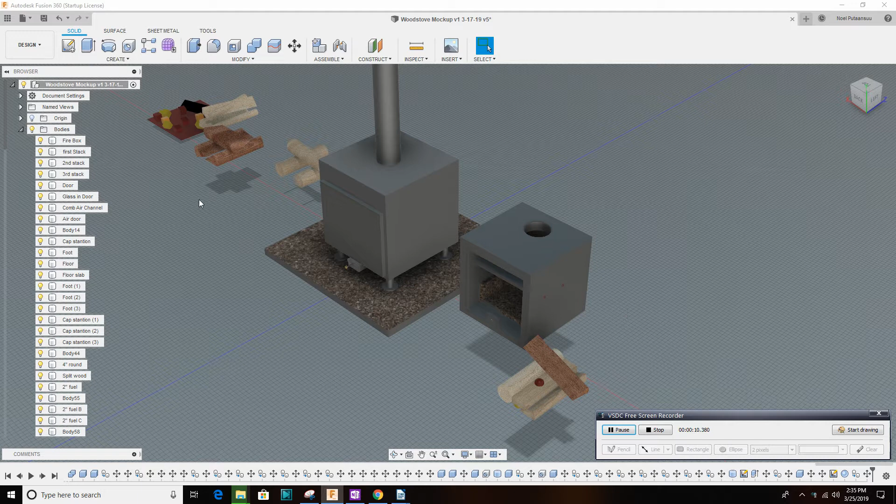Good day, this is chapter 2 on wood stoving. Fuel. I want to talk about fuel. I've got my stage set up here with some fuel, and I'll go through the various fuel.

This pile right here that I'm highlighting with my mouse are 4-inch and larger rounds. The next pile are 4-inch and smaller split wood, or just split wood in general. The difference being that on round wood you have the least amount of surface area compared to your mass.

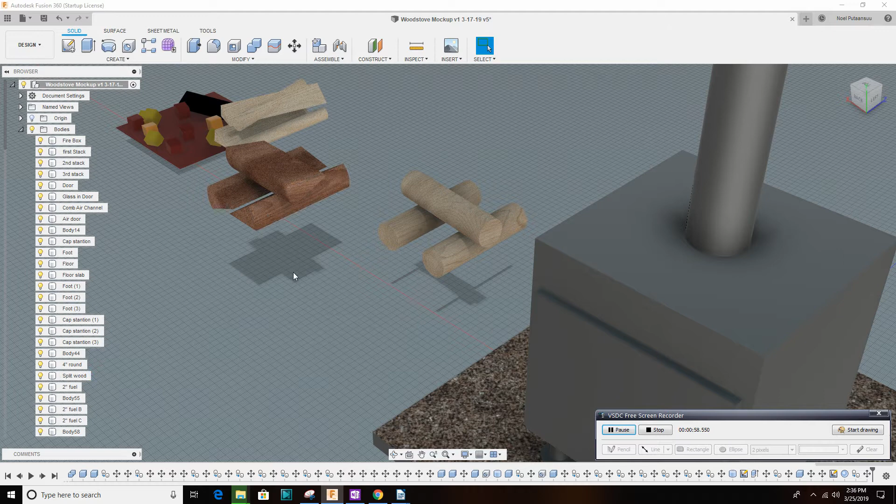Round logs are going to be your longest burning logs. Split wood are going to create more heat in a shorter period of time. You're not going to have as long a burn, but it'll be easier to get your wood stove up to temperature.

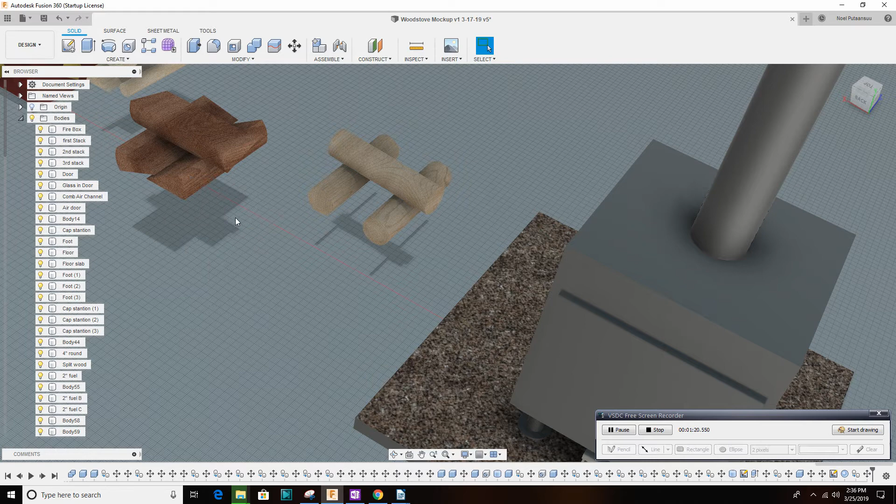My third pile over here, I'll try to rotate around to it. Now that didn't help.

This pile is anything less than 2-inch on its thinnest side. So a 2x4, a 2x6, a piece of plywood, a piece of oriented strand board, particle board would go into this category right here. These are going to be your highest heat producing fuels, shortest burn time.

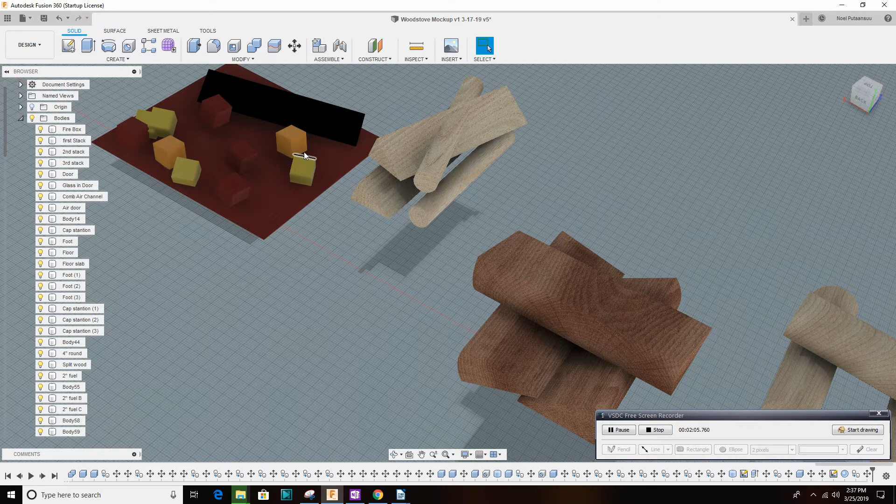On the end here we have a glowing ember. This icon CAD drawing represents a glowing bed of coals. And if you have a glowing bed of coals, you can easily put your 2-inch material or your split material and even one of your round logs on here.

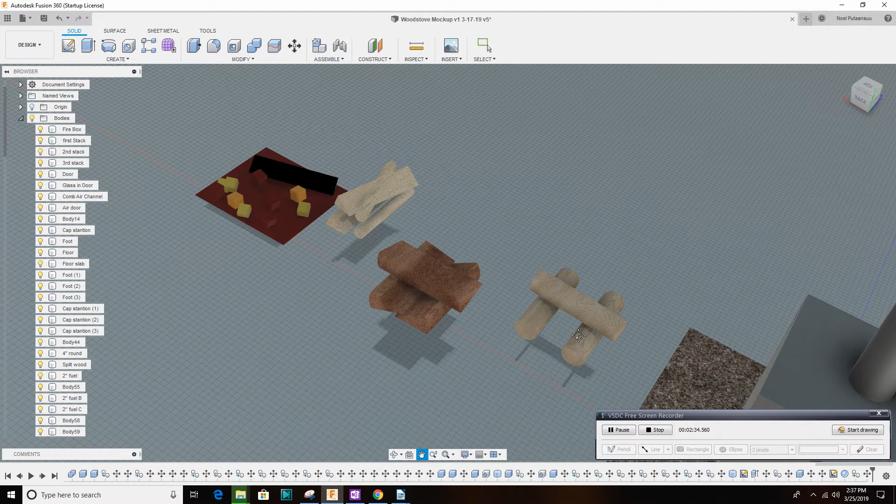Okay. Let's see if I can manipulate my... Alright, we're going to build a small fire here. In this fire we've got a round log over 4-inch, one of them. We have one split piece of wood. We have one 2x4 and another split piece of wood on top.

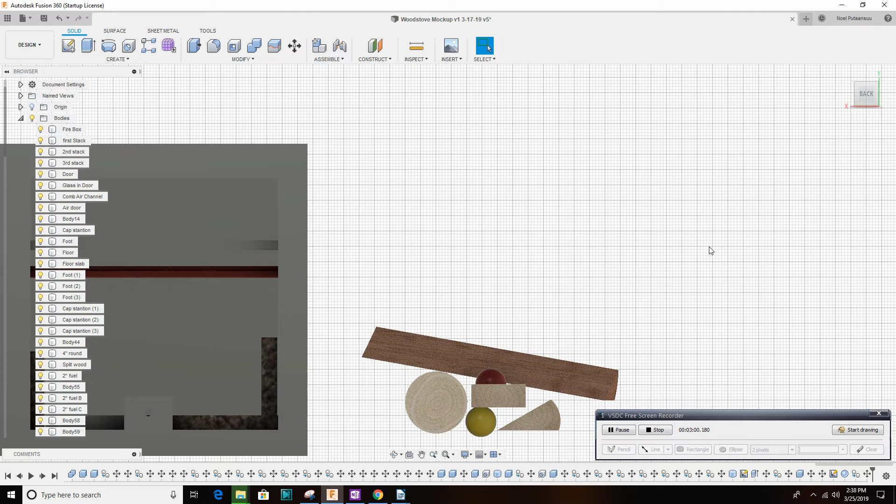There are two schools of thought on where you should light these. The top-down method wants you to put an ignition source, which I'm going to consider would be some paper, some wax fire starters, or light kindling. And this is where you're going to light for the least amount of smoke. I know in our family we tend to light it here because the airflow comes right in through here.

There's another subject on fuel, and it's called north-south versus east-west. Now if we take this pile and put it into this wood stove here, the airflow from this inlet, where most of the air comes in through this little hole here, would go right down this tube to the back of the stove. And that is what I want in my stove.

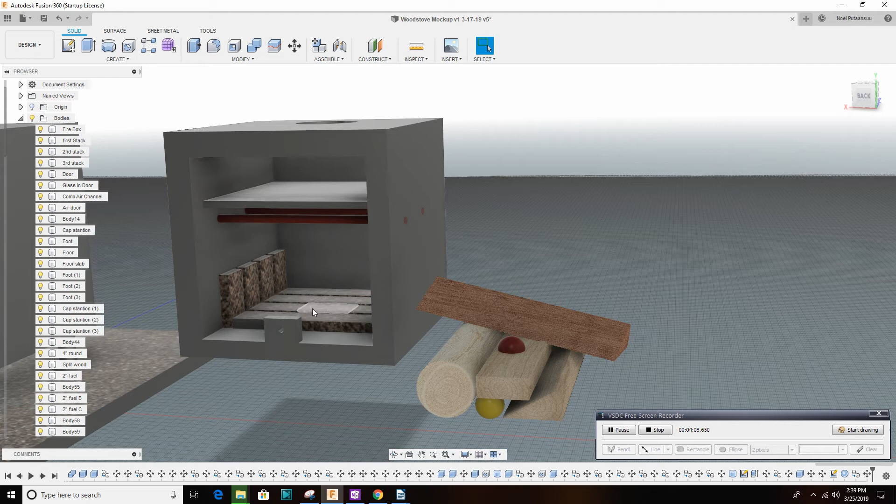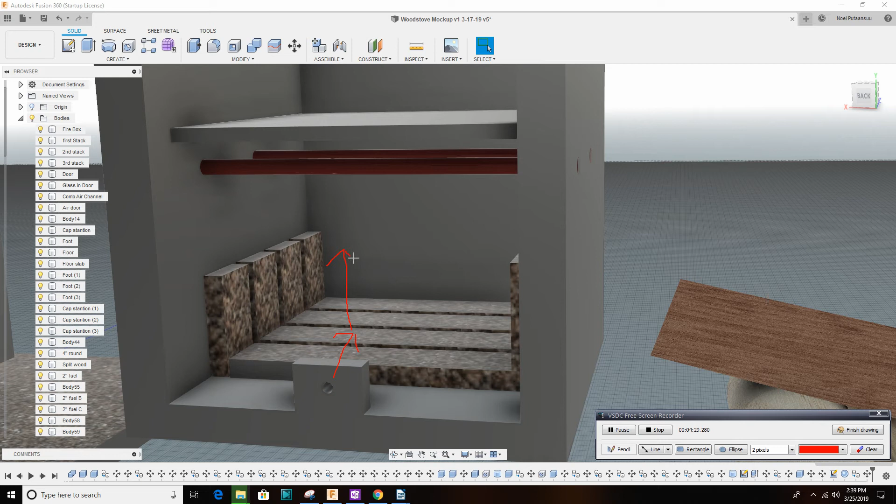If you put a piece of wood crossways, east-west in here, you get a situation where, if I can draw here, the air comes in and then hits the log and goes straight up and then out. The stuff in the back of the stove here often doesn't get into the reaction zone, and I've had even newspaper sitting at the back of my stove and not igniting till late in the process.

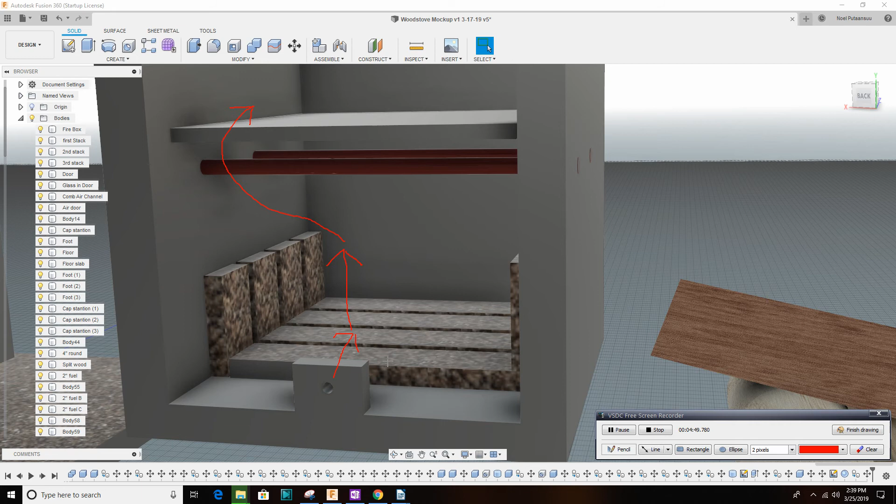So you want this, let's see if I finish drawing and I come back, you want this section down here to be clear so the air from this hole can travel all the way down to the back of the stove. That's my video on fuel.